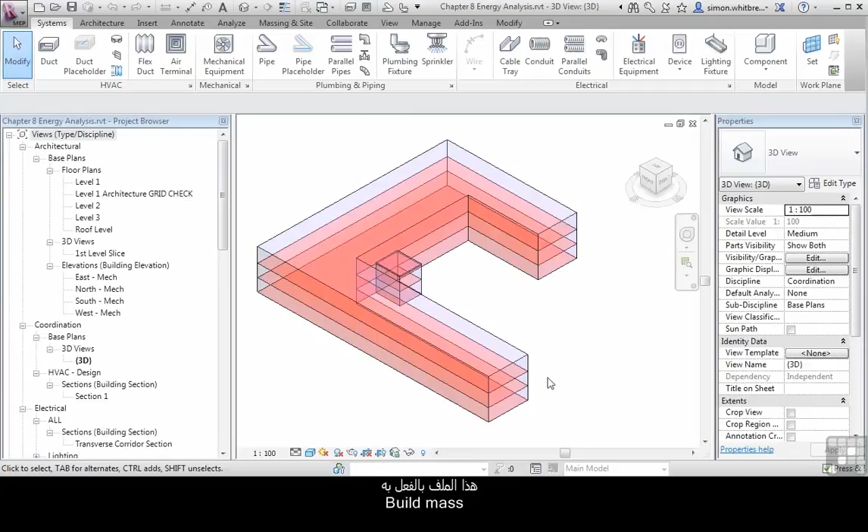From the Startup screen, click on Open and browse to Chapter 8 and open Chapter 8 Energy Analysis. This file already has a building mass in place. So what I'm going to do with this is delete it. As I said, I want to take you through this process. From the project browser, scroll down and open up Level 1 HVAC Energy Analysis.

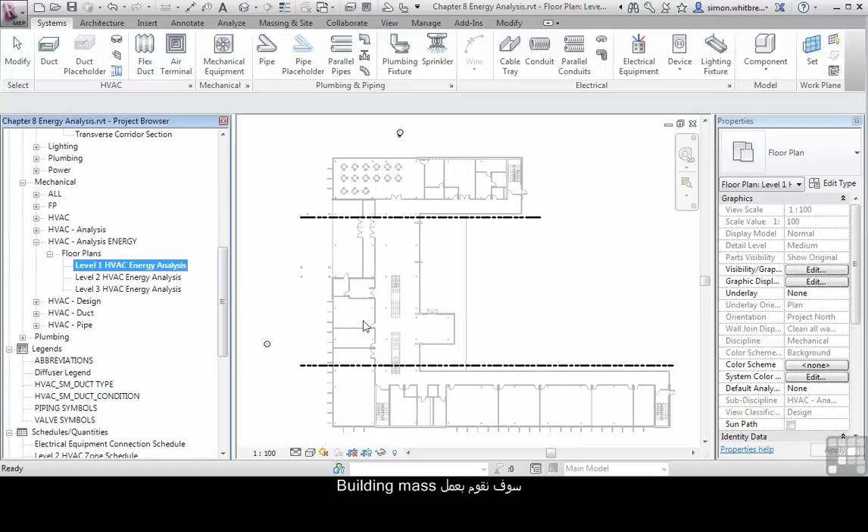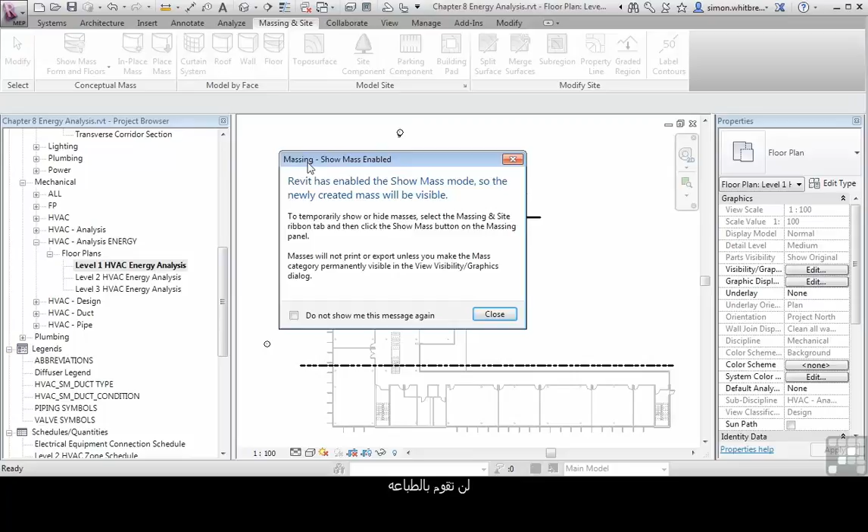At this point, we're going to start creating the building mass. Click on the Massing and Site tab and click on In Place Mass. Revit will now display a message saying that Revit has enabled the Show Mass mode, so the newly created mass will be visible. This is a temporary show, and in general masses will not print or export unless the category is turned on. Let's close the dialog. Give our mass a name, Building 1.

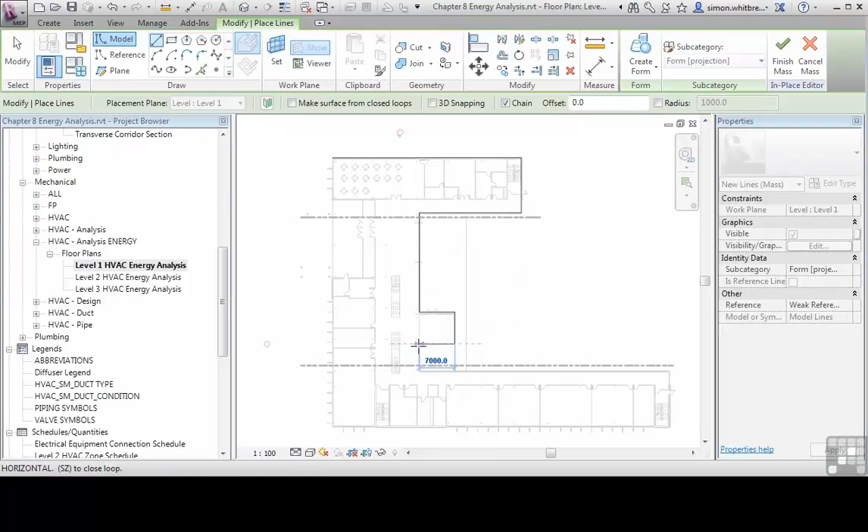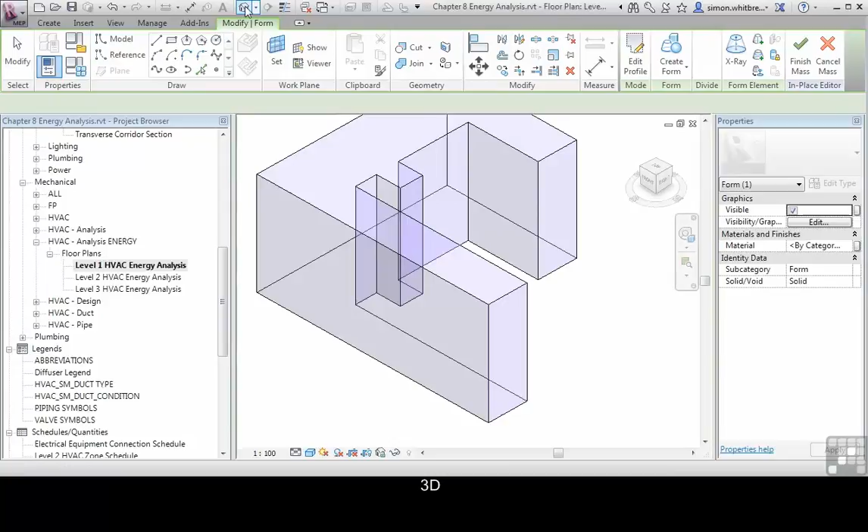Now from the ribbon, I'm going to sketch the outline of the building. For this exercise, I'm not going to be really accurate. So I've traced off the outline, click on Modify, and then select that outline. From the Contextual tab, I can now click on Create Form. From the Quick Access toolbar, click on the default 3D View button.

In here, we will need to see the building, as I want to stretch this mass to match the height of the building. From the View tab, click on Visibility Graphics, go to your Revit links, and turn on the Architecture link. Click on OK. I can now stretch the mass by clicking on the View cube so I can see the height of the building and using the blue grip to stretch the height of the building. Let's make sure it's more representative. When this is complete, I can click on Finish Mass.

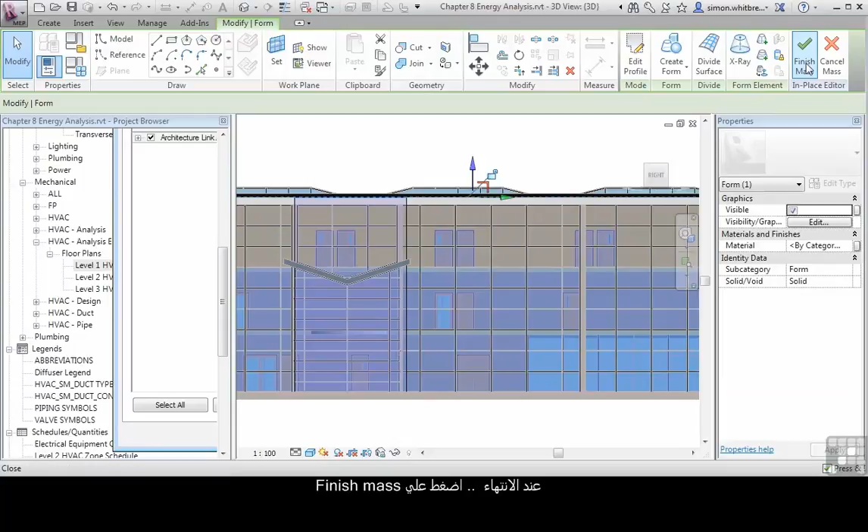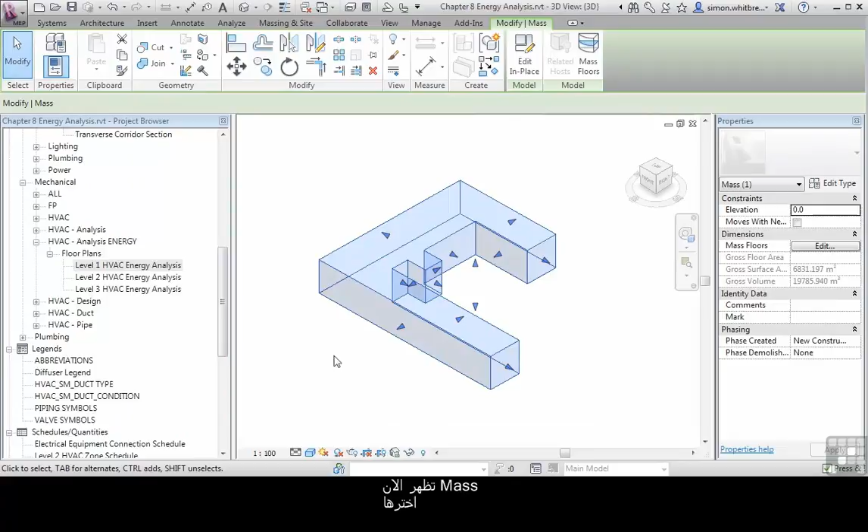Let's just orientate the building so we can see it in its entirety, and then go back to the View tab, Visibility Graphics, and turn off the Revit link again. With the mass now visible, select it, and from the ribbon, click on Mass Floors. We can now create mass floors for the building that, when selected, will actually give us the floor area for each level.

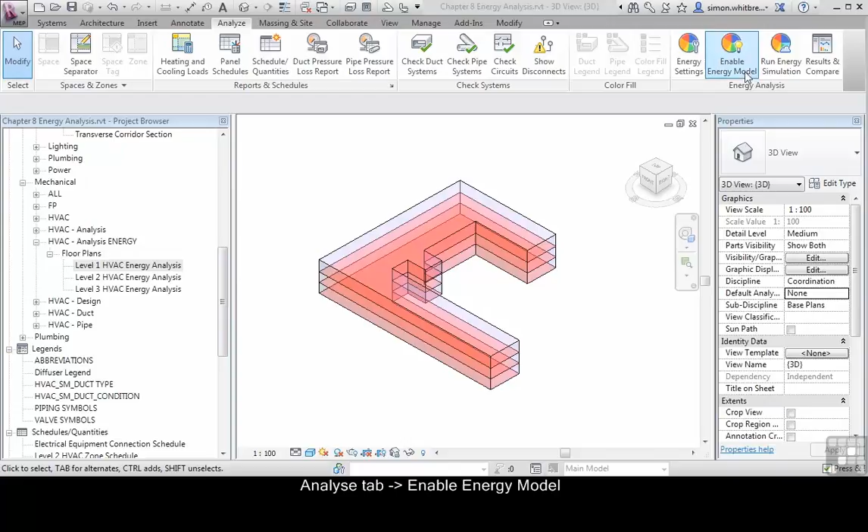I'm now ready to use the energy analysis tools. From the Analyze tab, click on Enable Energy Model, and then Run Energy Simulation. This is where you will need your subscription login and a connection to the internet. Give the analysis a name, and this sends the information up to the Autodesk Cloud.

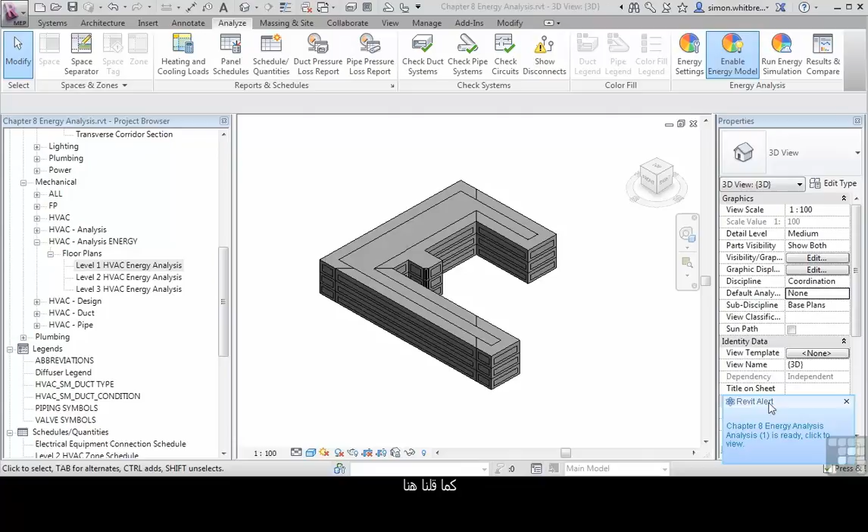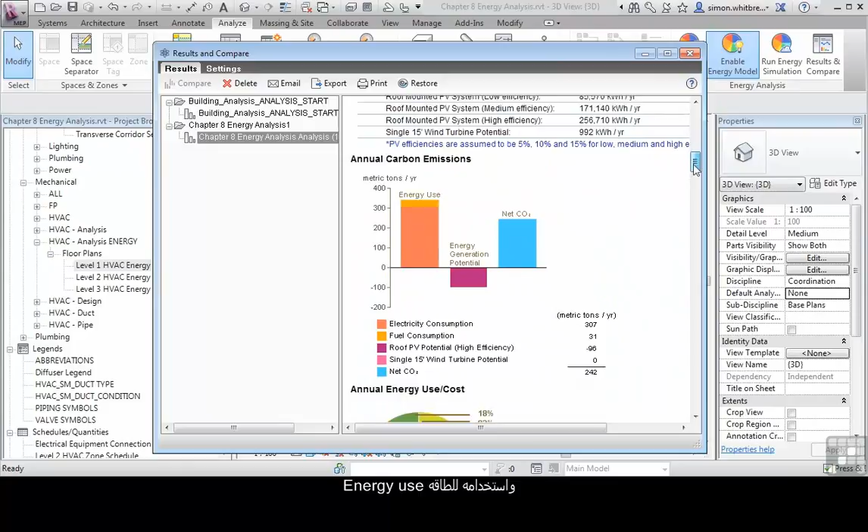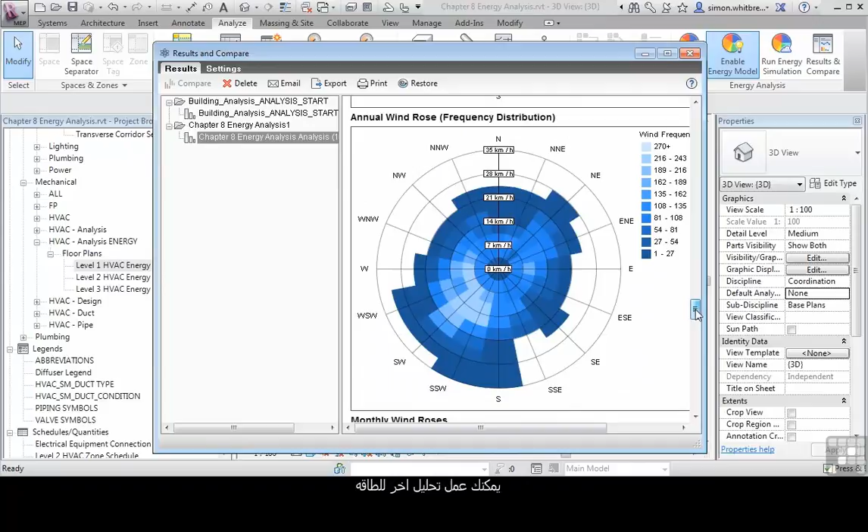As we see here, Revit gives us a notification that the results have been created. We can now click on Results and Compare and have a look at the results of our building analysis. You can see we can scroll down, have a look at the mass, where the building's located, and its energy use. As you carry on through the design process, you can then run other energy simulation tasks and compare the results.